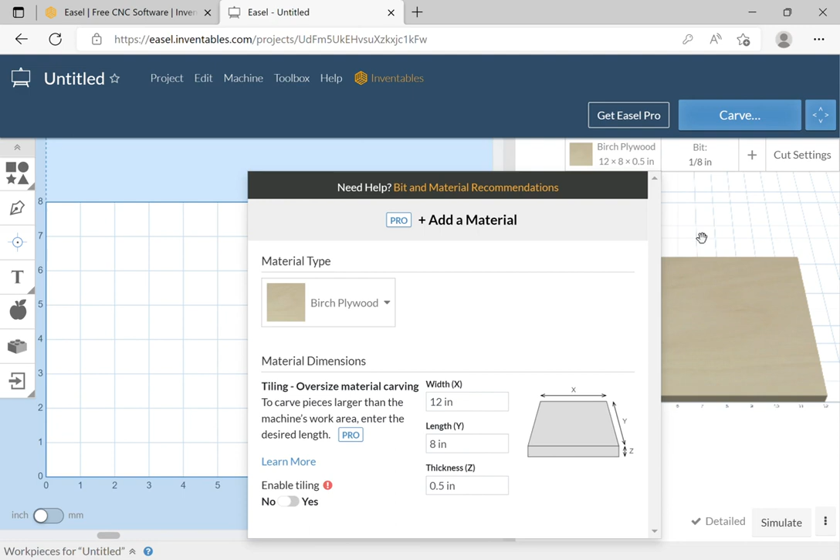In doing our work, we're going to use an 1/8 inch bit, as you can see here. Anything we put in over here as a drawing will be reflected over here as a cutting. So let's start here. This particular one has a different number of shapes that you can create. I'm just going to click on square.

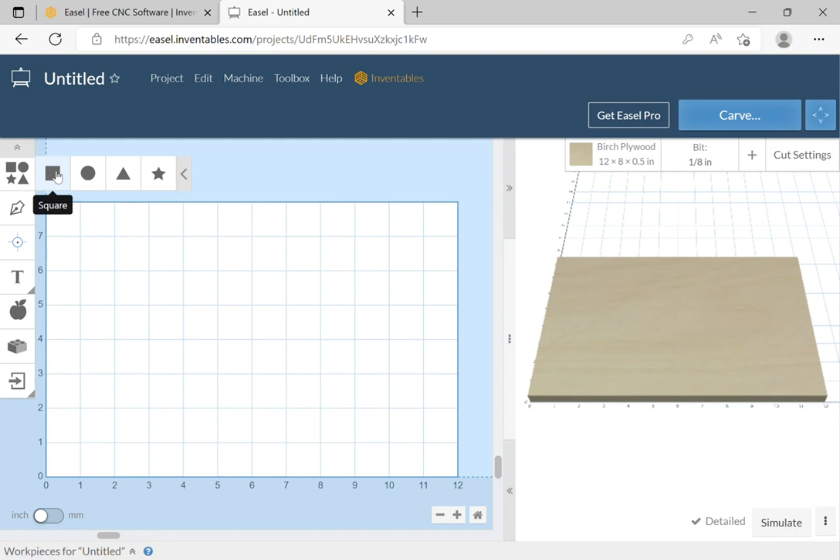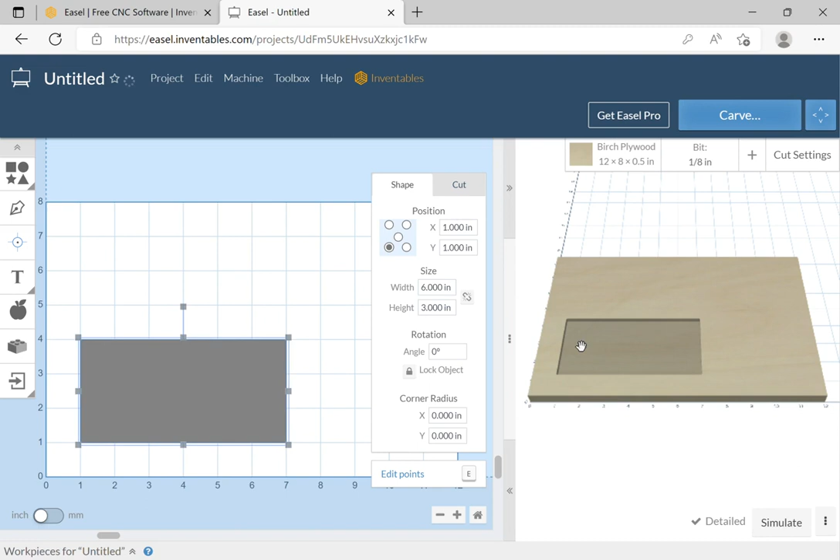You notice a square pops up in the graph paper, and you can manipulate it manually by just pulling on it, such as that, or you can use it to change the size manually. In our case, we're going to do it manually. I'm going to put a 6 and a 3 in there, so now we know our box is 6 inches wide and 3 inches high.

One other thing you can see on this screen is something called rotation. You can change the rotation of it just by pulling on this a little bit, or you can type it in. In this case, I'm going to type in 0 to bring it back to where we started.

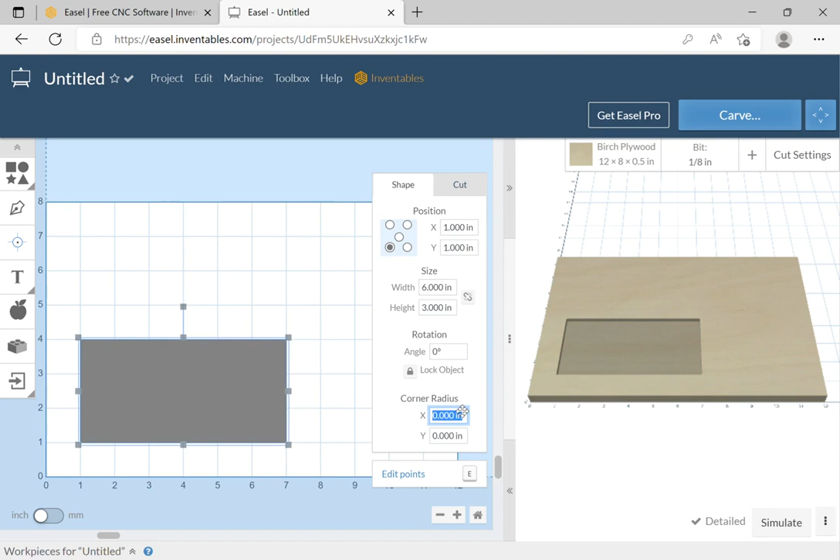The other thing you can do is add radiuses to the corners. So if I want this to look more oval in shape, I can just type in, let's say, a 1. Notice that it changes both X and Y, and it rounds the corners off. If we look over on the right now, all those changes have been reflected over here.

By default, the cut area, as you can see, is called clear out a pocket. In that case, it's going to clear out all the wood within this referenced object here. So you can see that we have that clearing everything out.

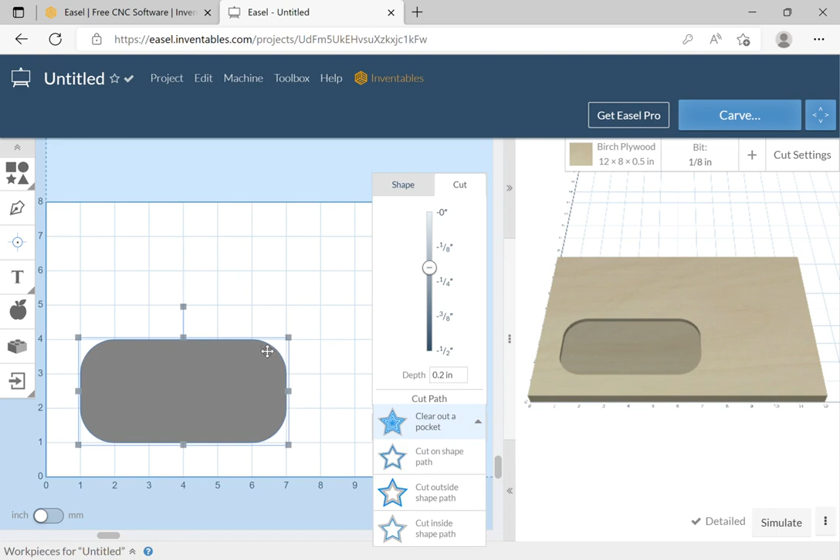Now that takes quite a bit of time, especially with an 1/8 inch bit. More normally, you'll have smaller areas that you do pockets, and for larger areas, you're usually cutting on the outside. So I'm going to cut right on the shape path, and that means I'm going to cut right on this line, this imaginary line around the box. And if I cut on that, you can see it changes on the wood over here to what I asked for here.

Now let's look at the depth of cut. This depth of cut came up at 0.2 inches. Yours will probably come up a little different. I've been playing with this a little bit, and I changed it in the previous setting, so it held that setting. Anyway, you can use your slider here to cut deeper or shallower.

As you cut deeper, notice this color change over here. It gets darker as you cut deeper. That's kind of helpful in that just a quick look, you can see what's going on there. I'm going to set the depth manually here, though. I'm going to say 0.1 inches.

All right. So now my cut depth is 0.1 inches. We know our box is 6 inches wide and 3 inches high. So that's pretty neat. Now if I want to center this on the board, all you have to do is make sure I highlight this box. I go up to Edit and Center the Material. Let me catch that again. I missed it. There we go. All right, Edit and Center the Material. Now it's centered on the board.

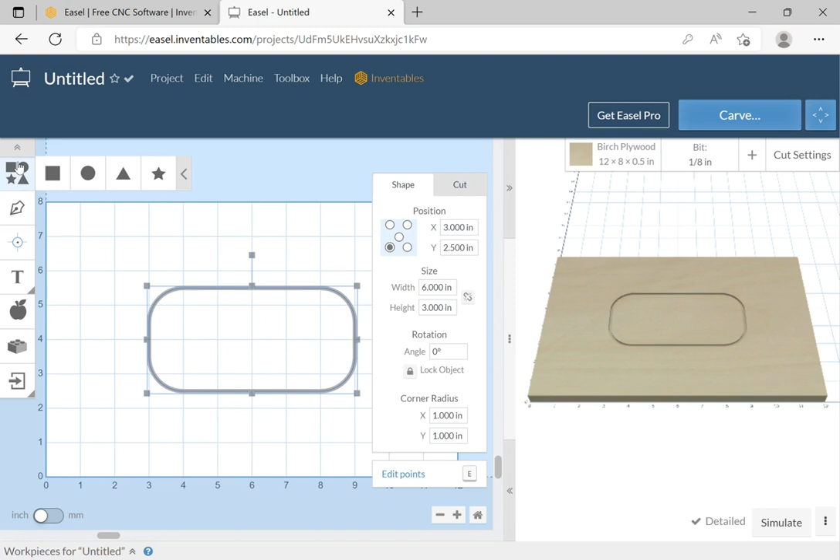All right, some of the other shapes you can put in here are circles. And circles are a little different in that the width can be changed while the height is left alone. And when you do that, you end up with an egg-shaped container. If you want to change them both at the same time, and we can do that, let me make them both equal to 1 and make it a circle again.

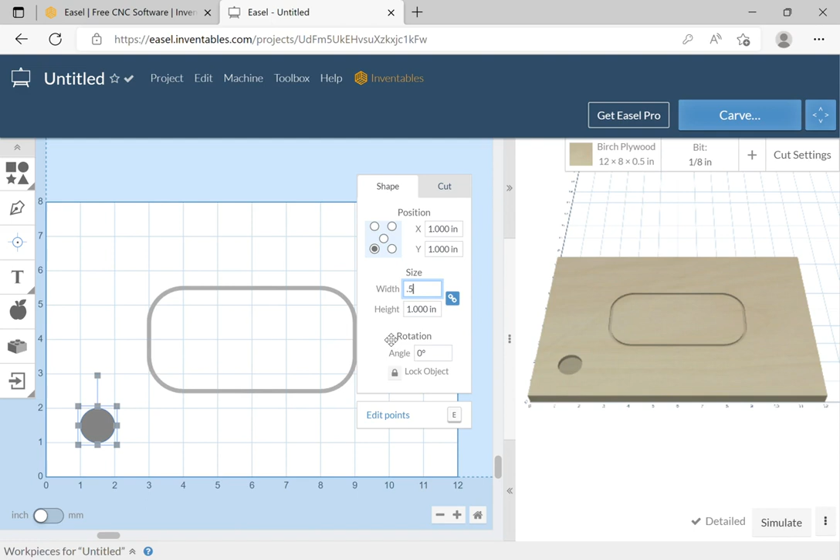If you click on this link button here, and let's say make a 1/2 inch circle, 0.5, you'll notice both of them change because I've got the link highlighted. Now, rotating a circle is not going to change it much, as you can guess. When I rotate, it looks exactly the same because it's a circle. But we'll put it back to 0.

Now going over to the cut area, remember it defaults to clear out a pocket. So rather than clear out a pocket here, I'm going to change this to cut outside the path this time. That means when I'm done, the object in the middle here is 1/2 inch in diameter. If I were to cut inside the path, you'll notice the object is much smaller. That would be 1/2 inch minus a quarter, twice the 1/8 inch bit that we're using, and that would mean this is actually a 1/4 inch dot there, not a 1/2 inch.

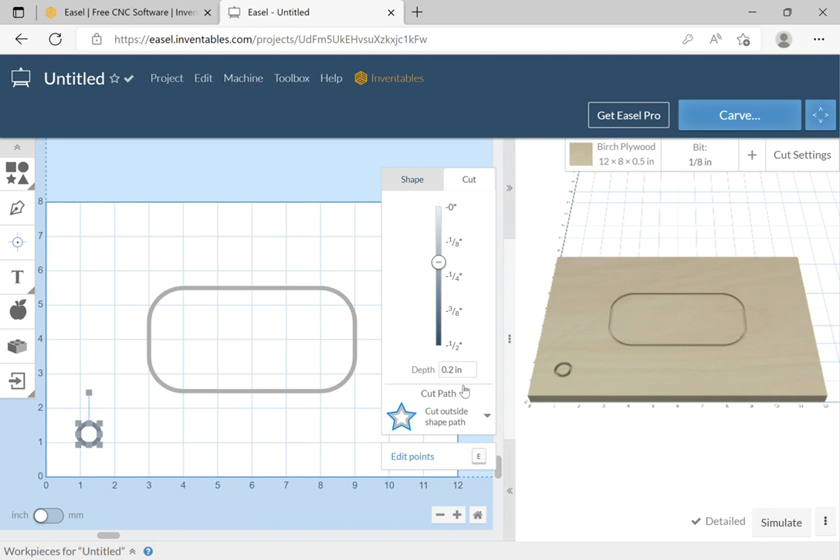So if I cut outside the shape, I get the full width of it. If I cut inside the shape, I have to do some math, but basically it's whatever the dimension is minus twice the bit size. All right, so now we have 2 of them. Now if I want to center this particular one, I could do the same thing. Edit, Center the Material. Now this circle is within the box.

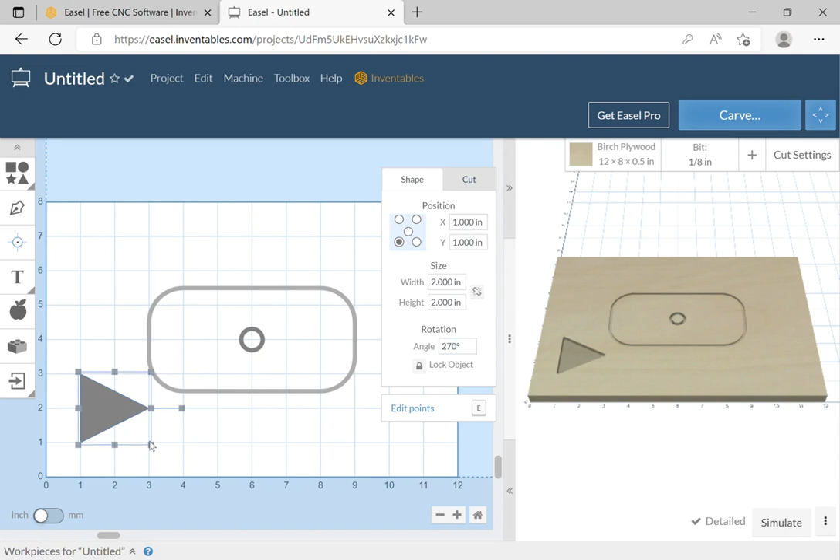Some of the other shapes that we can play with are a triangle. Triangles are nice. In this case, I'm going to take the triangle and manually turn it to the right to 90 degrees, or 270 degrees as it says here. Let me change that so it's exactly 270. All right. So now I have an arrow there. I'm going to make it smaller. Now I'm going to bring it over and towards the middle a little bit. I'm going to add a line to the left side of it.

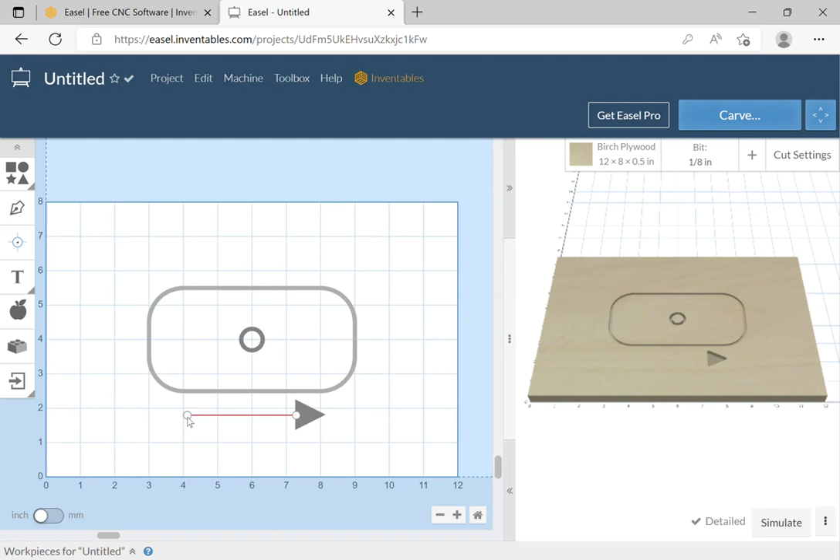Now I can do that with the line tool. As you can see, if I take the line tool and do that, click escape. Okay, now it has a line there, but as you can see, lines don't have any height. Let me delete that. That didn't come out right. Let me do it again. Take the line. I think I double clicked. Okay, that time I got it. All right, so now I only have 1 line. Before I had 2 lines. Anyway, we have 1 line, and lines don't have any height. So that poses a problem.

If I wanted to move these 2 objects, I can move them and put an arrow in here. So it works fine. The cut width of this line now is going to be the same as the bit size. We can't change that. As you can see, if we go back and click on just the line, it has no height. So if we cut it, it's going to default to whatever the bit size is.

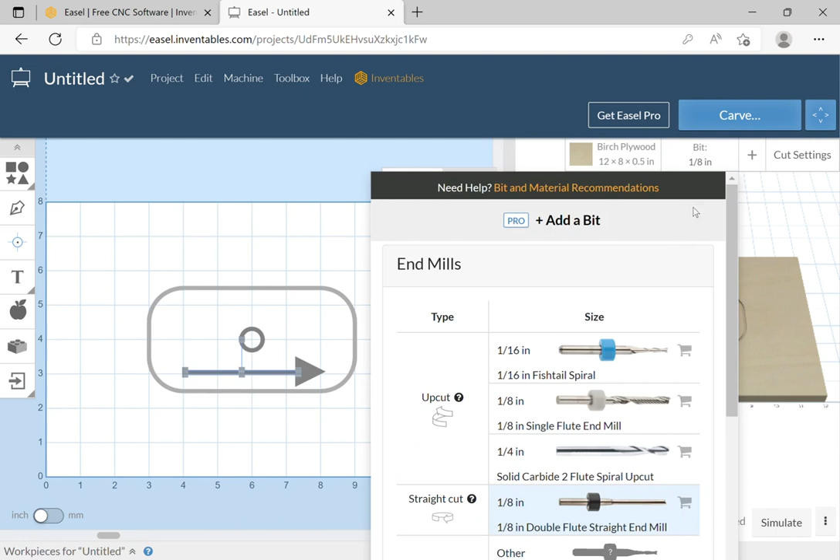If I change this bit to 1/16 of an inch, see if we have one of those. Yep, here's one here. And click back here. You'll notice the line is skinnier without changing anything else. The same is true of these lines out here and this line in here. They are skinnier because I changed the size of the bit. So everything is done in relation to the size of the bit. Let me make it back to 1/8 again. All right, and now we're back to where we were.

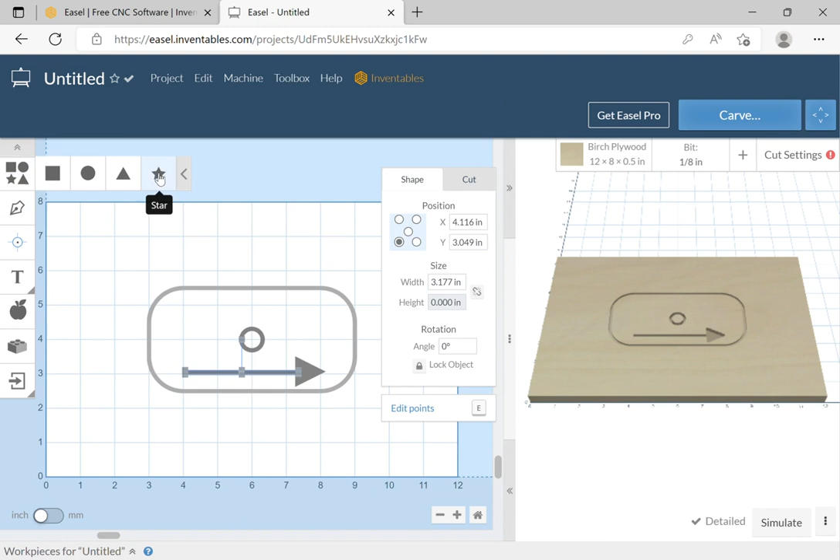So these are basically the essentials of what you can do with Easel. Let's try a few other things. We haven't done the star yet. Put a star down here. Then we can add a star to our collection of objects here. I'm going to make it a little smaller.

Now we have, I'm not quite sure what this object is, but we have something that has a star, a circle, an arrow, and it has an outline around it. If I want to make this star, as you can see, if I click the cut panel, you can see that it's cleared out as a pocket. So it's scooping out everything within the star. The same is true of the arrow that we made.

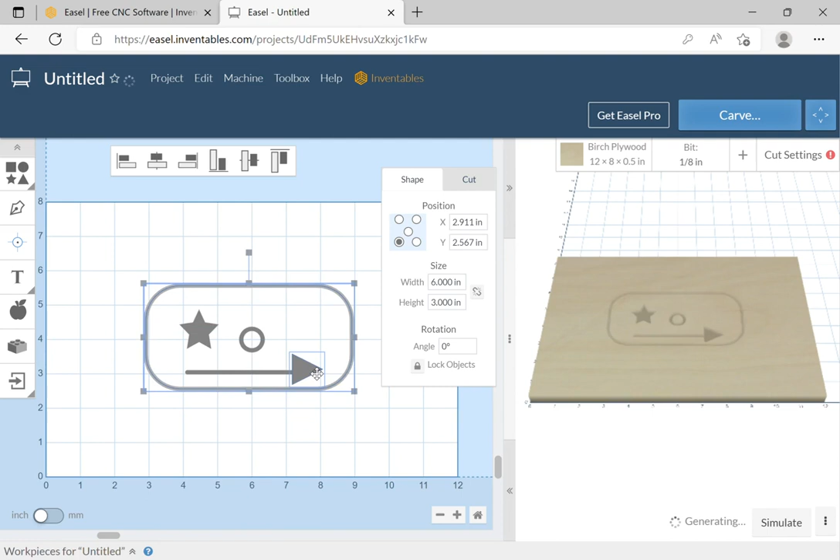But let's take a look at the arrow. Something a little different is going to happen here. I'm going to take this, and we're going to look at our cut. Let me get this right here. Oh, let me move this out of the way, it's easier. I'll move this back out of the way here.

Alright, so now when I try to change this to cut setting, I'm going to cut it outside the line. Cut outside the path. The arrow, of course, looks bigger, doesn't it? Well, look what happens when I try to do it with the line itself. Hard to grab that. If I say try to cut outside line, you can't do it. In fact, it doesn't even come up.

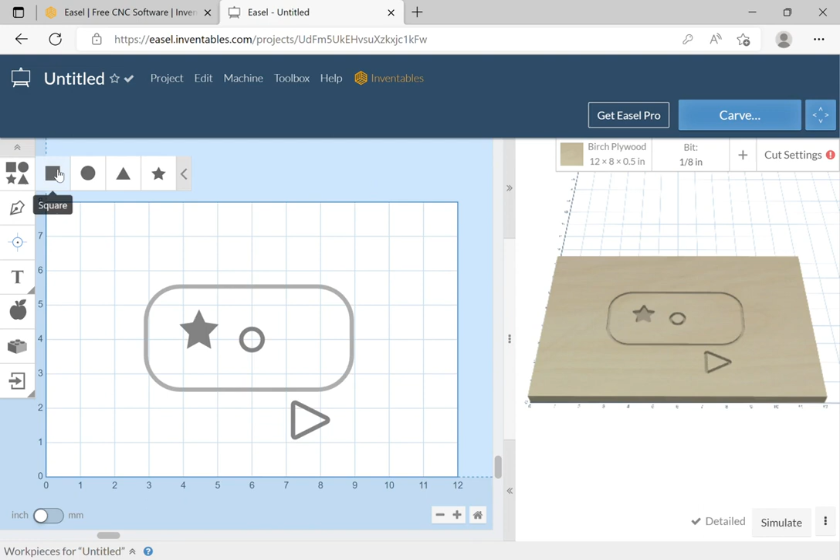Now, why is that? Because the line really has no width. It really is just a line. Just like a line on paper really doesn't have any established width until you give it width. So what I prefer to do here is to get rid of this one, and I'll hit the delete key and get rid of this particular one. And I'm going to actually put a box here. But it's going to be a very skinny box.

So I'm going to bring it this way. But I'm going to bring it down. I'm going to move it up in the middle here. Okay. Now you see that we have height in the box. And I can make that height pretty skinny. I can't go less than the bit size, can I? Because the minimum I can set there is about 0.125 or 1/8 of an inch. So I'm going to say 0.15. I'll get a little more. So that's the width of our box.

Now if I highlight both of these, I can change the cut. I can say cut outside the path, and you can see it cuts outside the path of my box. If I say cut inside the path, it gets a lot smaller. And if I say clear out a pocket, you'll see that this arrowhead looks more like a pocket, but this didn't change a lot. And think about what happened there.

If I say clear out the inside of this going into the arrowhead, the height moved a little bit because I was playing with it, but the height is 0.15, where we had left it. At 0.15, if I were to run this bit inside, what I'd end up with is a pocket. Because if I clear 1/8 of an inch off of each edge, there's going to be some overlap in the middle and there's going to be nothing left. So it'll look just like it did when we selected pocket. Doesn't change. All right?

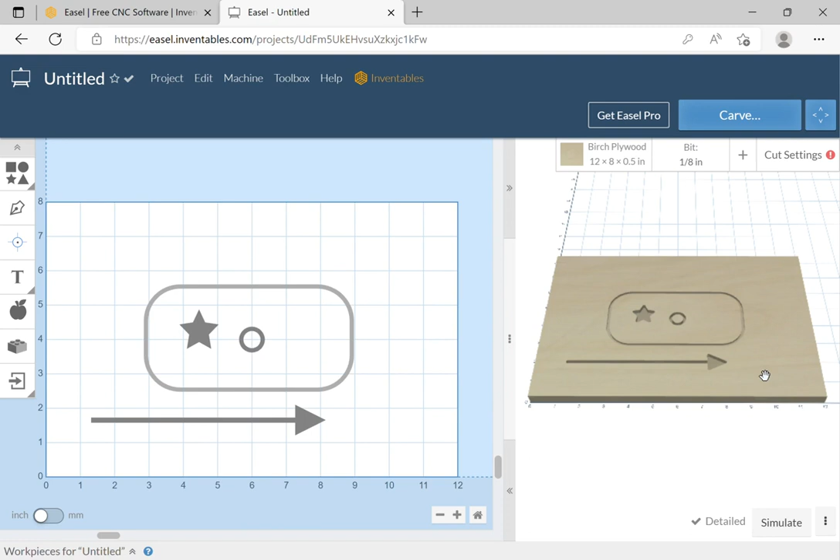So that's what gets you started on this. Why don't you practice moving this stuff around, create some different figures up here, and just play with it a little bit. And we'll pick this up again with a little more detail in the next session.